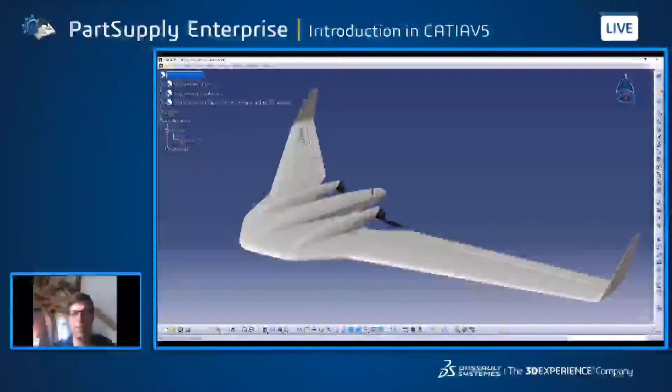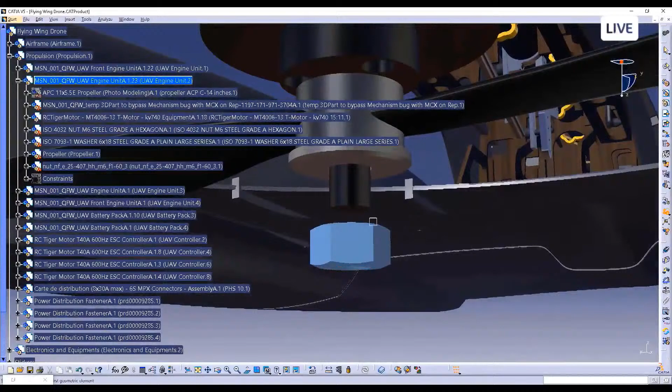Thank you, Cyril, for letting us present PartSupply Enterprise to the CATIA community. Today in our webinar, we'll see how designers can benefit from PartSupply Enterprise directly in their design environment. We will look at the designer experience and see how he can save time searching for the component he needs among catalogs approved by engineering and sourcing managers. If you are interested, stay with us for the 15 following minutes, and let's see with Chloe, who will play our designer today, how PartSupply Enterprise will help you in the future.

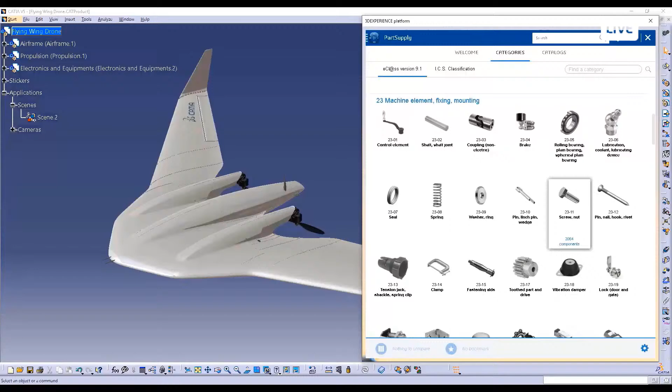We'll begin with a little tour of PartSupply community, PartSupply Enterprise, and its data science experience, classification intelligence, and standardization intelligence. Firstly, what is PartSupply community? It's a place where you can find nearly 50 million components provided by more than 1,000 suppliers. We can browse through all that content, mainly electrical and mechanical, but not only.

Here we are working on a drone and we are interested in changing the DC engine for a lighter one. We can navigate through the categories and find the full list of DC engines available in PartSupply.

Let's look at one. Here we can see how we display the information. It's the same for all the components of PartSupply. Firstly, the design information of the component, then the engineering information, and the sourcing information. In the sourcing information, you can see the name of the supplier and its contact. In the engineering information, we can see the datasheet.

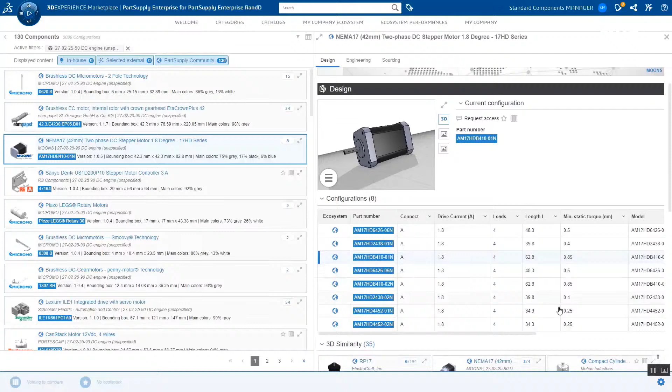And in the design part, we have access to three things. The first one is the drawings, the pictures of the component and its configuration, and then the 3D player in order to see in detail the component we are looking at. Then we have the list of the different configurations, and we can refine through the value of the attributes. Then we have access to all the 3D similar components.

So what is the 3D similarity list? It's all the components that have a similar shape to the one we are looking at. It enables us to easily identify alternatives for the motor we selected.

Now we will go back to the list of DC motors. So here I am adding to the compare different configurations of motors that would fit with my drone arms. I will open the compare view in order to compare the attributes side by side. And here we can again open each component and see its detailed view.

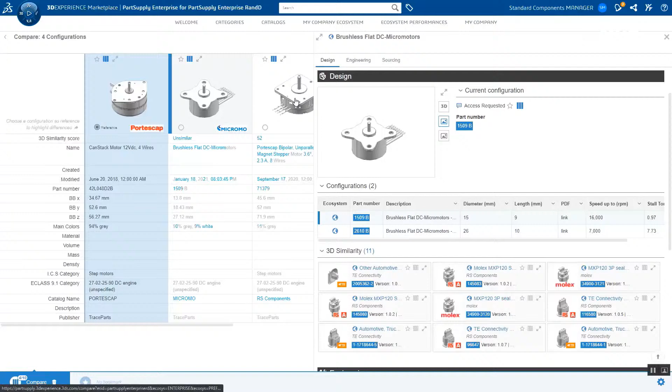And let's say that we will choose the first motor for our drone. I will show you how to use it in CATIA V5. In CATIA V5, I just click on Replace, and a new motor takes place on my drone. And here is my drone updated.

So here was the presentation of PartSupply community with its 1,000 suppliers that we can see here. Among that content, we have built PartSupply Enterprise.

PartSupply Enterprise gathers two types of content: external catalogs, which are a selection of different configurations available on the market made available for the designer in PartSupply Enterprise, and the in-house catalog, that is to say all your company's 3D component patrimony coming from several sources, automatically indexed and pushed into PartSupply Enterprise to be available through the same search and the same category navigation as the external catalogs, for all your designers directly in your CAD environment.

And then, to complete the picture, we created classification intelligence and standardization intelligence in order to help you organize all PartSupply Enterprise content to streamline it in line with your company's sourcing and standardization strategy.

So now we will see how to break down the silos while managing your company components to enable your sourcing and standardization strategy. Then we'll see how to classify your parts to organize and gain insight into your 3D components with our new data science experience, classification intelligence.

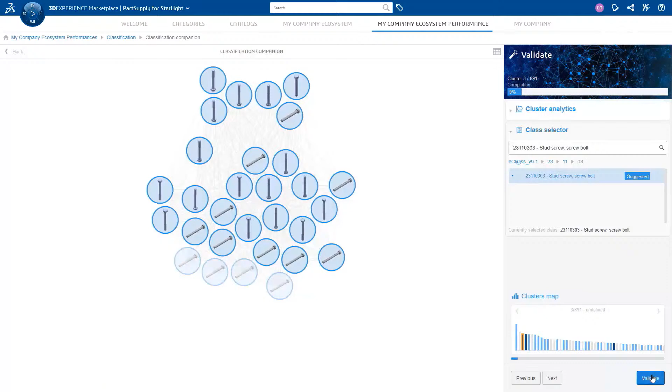With classification intelligence, we can observe and monitor our global component performances from the PartSupply Enterprise Performance tab. Here we can access the classification intelligence service, in order to organize and reveal knowledge from your patrimony of 3D components. Classification intelligence provides a new step-by-step process enabling massive and automated classification thanks to the 3D shape and semantic complete recognition of components. Classification intelligence analyst is empowered with a force-directed graph interface and completed by a machine learning

eCl@ss classifier. Once classified, your components are more easily found, reused, and can be compared in detail with each other and all market components from the PartSupply community.

Now, what are the benefits from PartSupply Enterprise in-house catalog building and the usage of classification intelligence? Thanks to the Edge agent, we regrouped all the company components in one place, accessible from the designer's environment. In PartSupply, we extracted all the necessary information to build a similarity list of components based on their shape and semantic. Finally, in classification intelligence, we organize components to search, reuse, and compare them easily.

We'll now see how we manage market components in PartSupply Enterprise. Let's see with Chloe, our designer, how it works in the design environment when you search for sourceable components and you want to request their qualification.

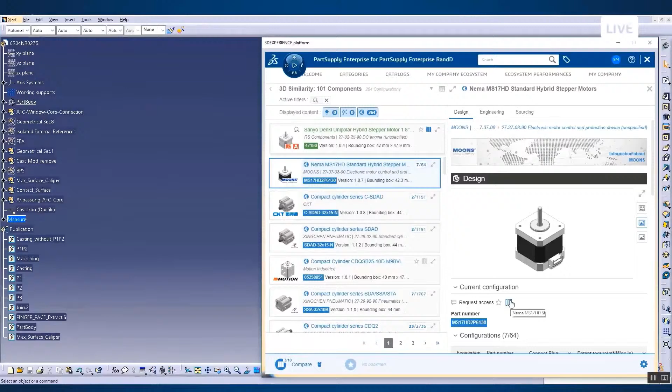Hi, I'm Chloe, a CATIA V5 designer, and I can reuse parts qualified by my enterprise thanks to the power of 3D similarity. I can easily find all the similar parts of the selected providers working with our company.

I can review the part in 3D, access its sketches and photos. I can compare these parts and even parts non-qualified coming from the marketplace. Here, I can access the 360 view of the part and decide if it's the right part to use.

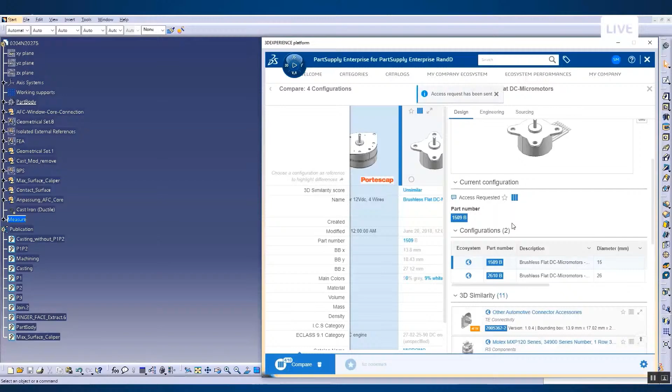Let's say that the best option is the part non-qualified. So I can request access to this part from my component manager, who will receive my request. He will be able to review the component's information and decide whether to add it to the enterprise ecosystem.

Luckily, he has accepted, so I can open it, insert it, or replace it. So now you can see that my design is updated with the part from PartSupply.

As component manager, I received and approved Chloe's request for a new DC motor for our drone. I'm also able to define and manage the list of suppliers and sourceable components approved for my designer's usage. I select my preferred partners from among hundreds of suppliers qualified by Dassault Systemes.

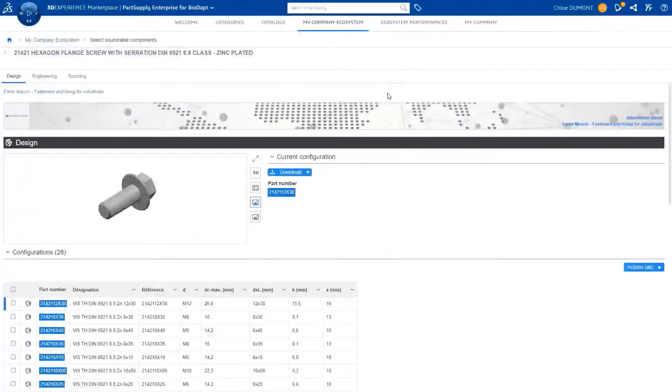I'm using semantic tags to navigate and filter French supplier catalogs to select my favorite part. I can review its 3D, its drawing, I can access its documentation, technical and sourcing specifications.

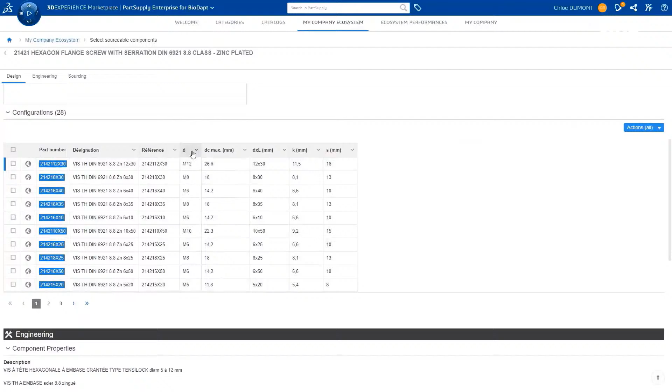I can select all of its configurations, or just a few, depending on my needs, to be reused by my team. Once selected, I can enrich the part to add internal information, like an internal part number or a qualification status.

To sum up, the key values are: 1. To empower the designers with up-to-date standard part catalogs directly accessible in design in real time. 2. To maximize reuse by finding similar parts to the one selected. And 3. To enforce the reuse of standards by replacing parts in just a few clicks directly from CATIA V5

and SolidWorks Desktop. We have seen how we manage internal catalogs with multi-sources. We have seen how we help classify it with classification intelligence. We have then seen how we manage preferred content coming from the market. And we will now see our solution for deduplication and identification of the components to be reused by our designers.

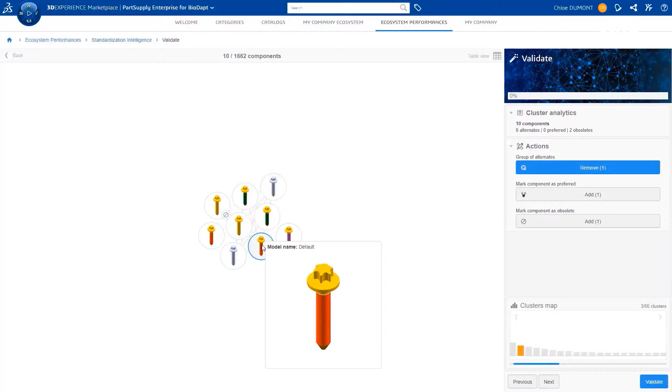Today, Standardization Intelligence provides a step-by-step process enabling powerful product standardization based on the right information. It helps to clearly identify for your designer which components are the reference to use and reuse, which ones are considered as alternate, and which ones must not be used. These standardization decisions are made by and shared between the engineering and sourcing departments.

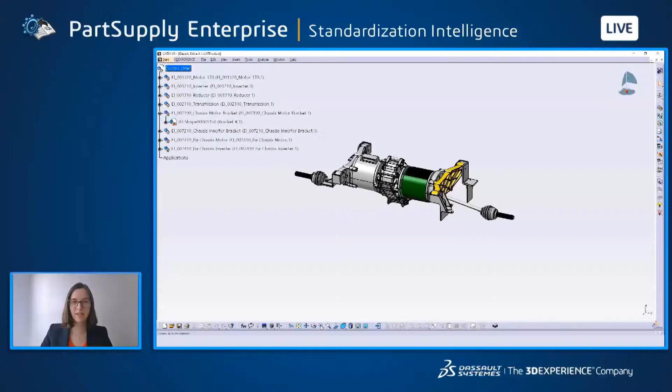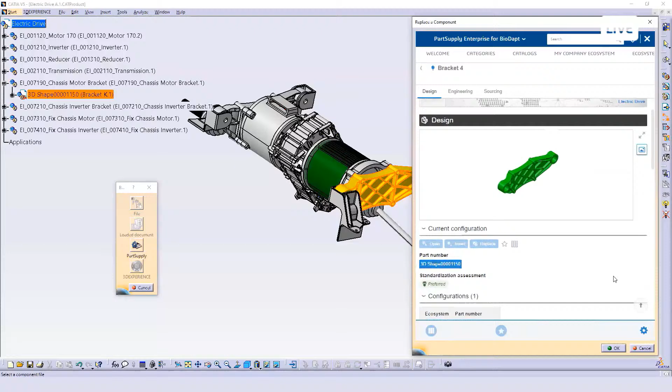Let's see now how Chloe will use this information displayed in PartSupply Enterprise for each component. Back in design, to enforce the reuse of the right part according to enterprise policy, as a designer I can find similar parts and preferred components previously defined by my component manager. I can reuse these components in my design seamlessly and in one click.

Thank you, Chloe. And now we finish with the two main values provided by the Standardization Intelligence Service: its algorithm helps deduplicate company components and enforces the reuse of the preferred component identified as optimum by engineering and sourcing departments. Thank you very much for your time, for watching, and see you soon using PartSupply Enterprise directly in CATIA V5.